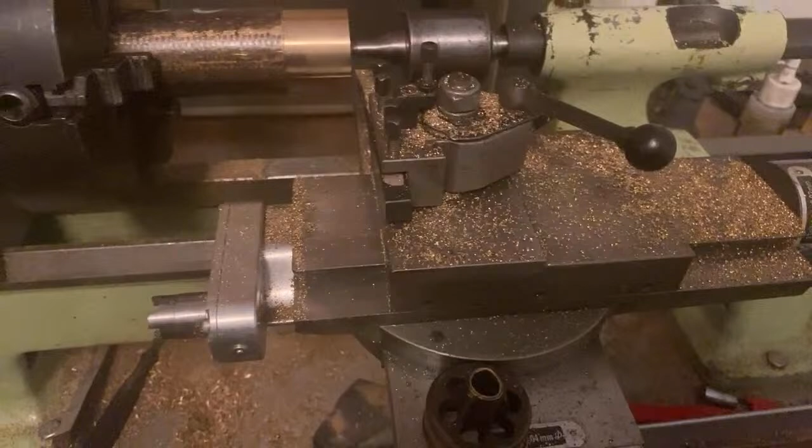And yeah, so forth, we will catch up tomorrow sometime and have a talk about it. But what happened? Got this painted. Look, honestly, yesterday morning I come in here and I thought I'm going to have a clean up, we're going to get some work done. Yeah, still pile of brass at the lathe. We haven't had... I'll catch up with you, Dan. It might be tomorrow night. It'd be good at some point, will we?

Anyway, I might be fine tomorrow. There's still a crap load of stuff we could do, scrape some grease off the roller if we run out of things to do. Honestly, I was going to go and give degreaser too, and I haven't done that. I haven't done anything. I had big plans this weekend - I was going to go non-stop, get everything ready to go. I spent 3 days in bed, 4 days in bed. And probably it's a long time since I've done that, so it probably needed it.

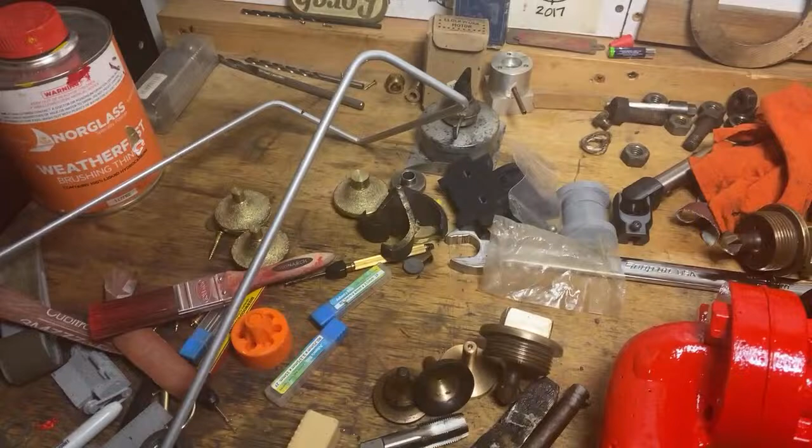So that's about it, that's what's happened. I haven't got any further to bending this up. I was going to come in and do this too. 90 proof alcohol might be the answer. The trouble is I don't get anything at all done the next day.

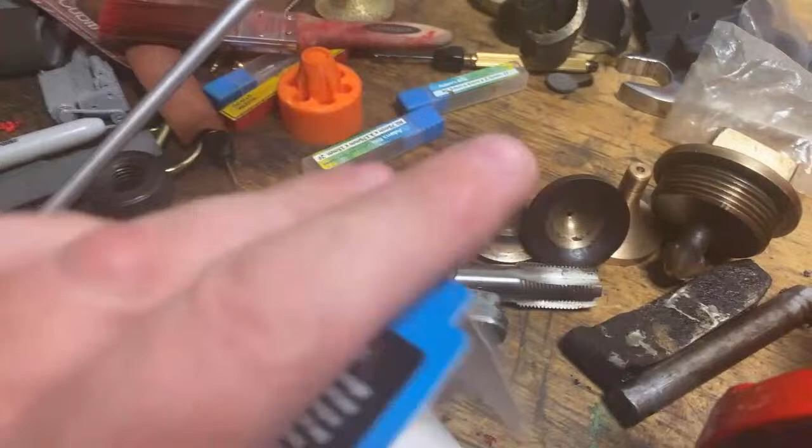Get the Robey back steaming would be great. I wonder how you're getting on with that smoke box and stuff. I did sit down with some CAD and converted this top quality Robey drawing. Right, that's what we got - top quality Robey drawing, converted it to a lot of numbers so that I can profile machine these.

These need doing at some point, so we've got to basically turn this casting, finish the bottoms of them and make them all fit, and then grip them that way around and profile turn them to match that. So it's a job that needs doing, but there's a list of jobs that need doing.

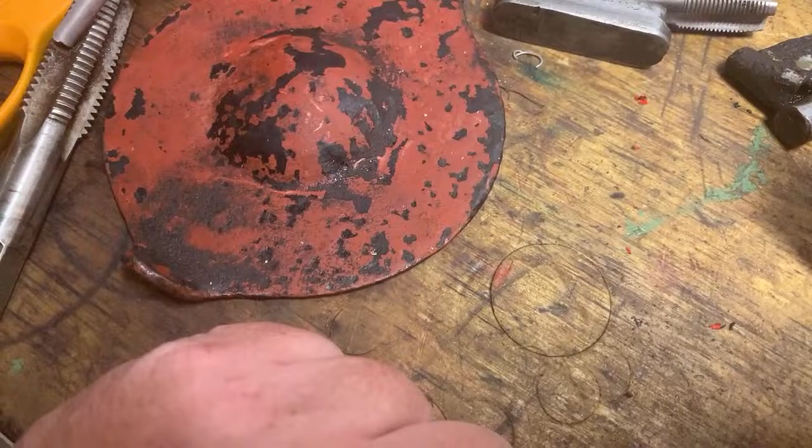There's also a bit of a mix up at the foundry because people are too petty to... it's not even that they're petty, they like to have... every organisation, every community organisation I guess, has that 1 or 2 or 3 people or whatever - 5%, 20%, 10%, probably 10%, 5%, 10% of the members who think that setting the cat amongst the pigeons is the best way forward for any organisation, and that's their mission in life, to do that. Not particularly happy with a couple of members at the Foundry Club. They know who they are. But anyway...

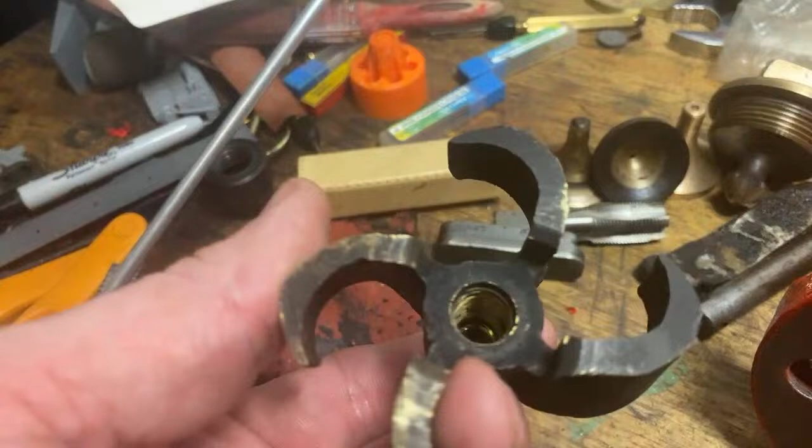Dallas has gone walkabout, and not sure when he'll be back, but he's got my patterns for that and some other patterns as well. Not helpful because I can't do the job until I get the patterns back.

That's all sort of been happening in the background too, and I've been trying not to be too involved with it all. But as I've said before, when 2 or 3 of us sit down in my age group that don't have a lot of real medical hold-ups or issues, I'm the youngest one of them. And I'm really the youngest active member, and maybe the most capable, I don't know, probably 4th or 5th down the list of people who've got some sort of knowledge about everything that happens at the club and the processes involved.

So I kind of feel like if you're going to keep the community going, someone needs to step up and help with that, and I'm not feeling like that's the thing. I'm fighting that, I'm resisting it.

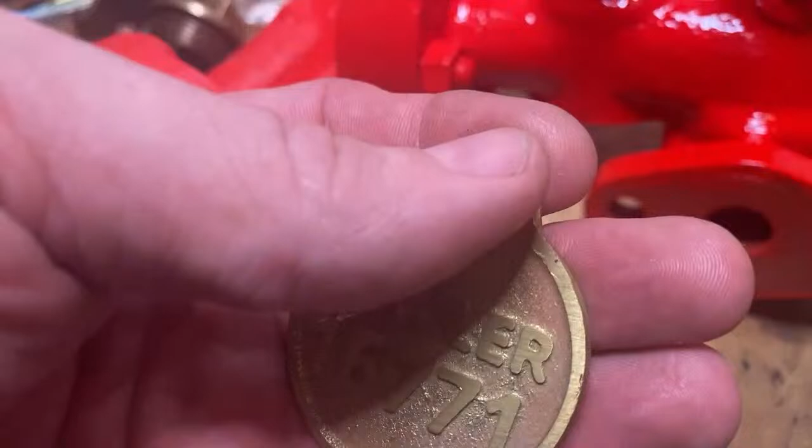This was something I was going to do and I forgot when I was red painting. I still will. Got these tokens and I wanted to finish these up and put some red paint in them. Because, anyway, that hasn't happened either. It's not a big job. I got the gaskets cut the other week.

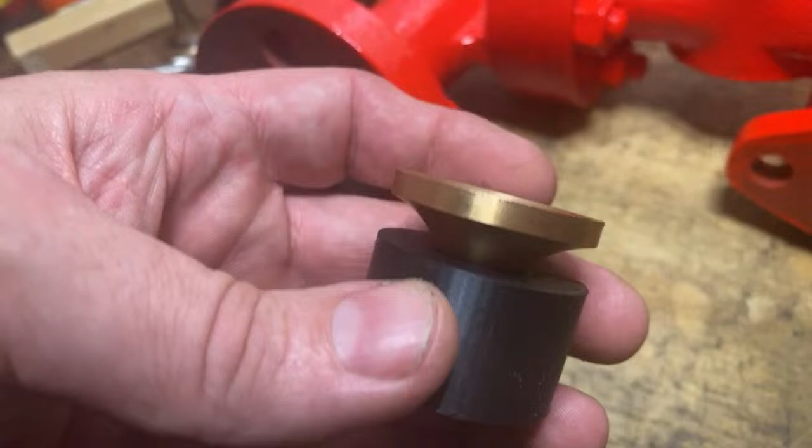This didn't work, right? This seemed like a really good idea. I don't know if I touched base with that. Right, the idea was that we 3D print a soft jaw to hold that, to machine the inside. Right, which we've done. I've machined the inside of them. They're pretty nice. But this is too slippery.

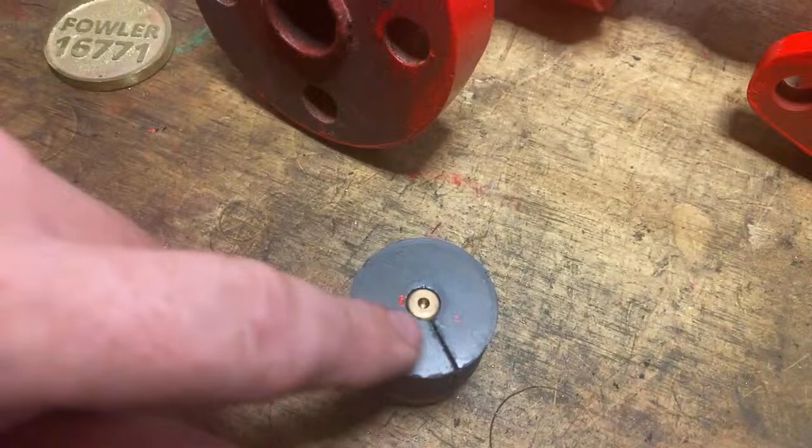Probably a piece of... I wonder if there's a way to do this with a groove in it, so you could run a bit of wet and dry, like a bit of emery tape around the groove. Run a bit of emery tape around the groove to grip it, so that when it squeezes it in, it squeezes onto there. We put it through that groove and round there, and make it a fraction oversized, and make a circular groove in there just so that it's easy to push in. Anyway, that might work. It might be a future iteration of that, but this one doesn't work.

So at about that point, I remembered that I had a collet chuck. After I... So I gripped him in a collet and had no further problems.

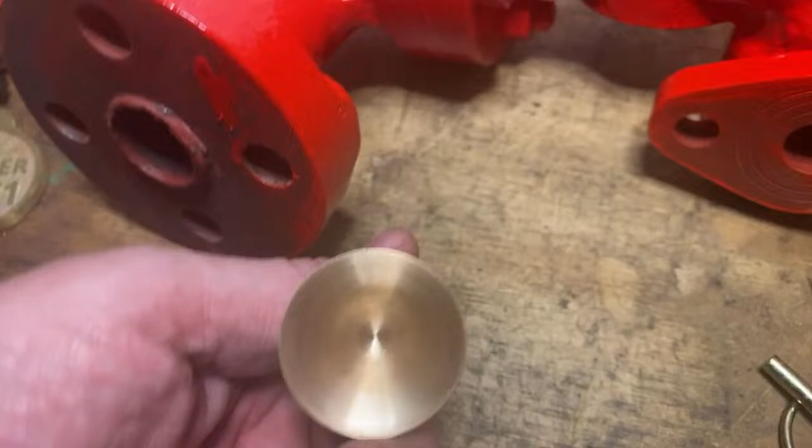But I run into them with... I didn't have a ball end mill, a half inch ball end mill. It would have been nice if I did, but I haven't, and I really couldn't run to one. It occurred to me that I probably should, but I didn't.

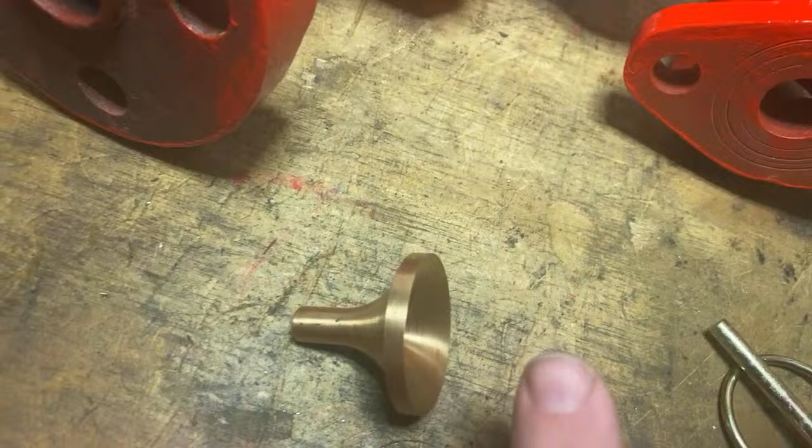So I just got a core bit and run in there a half inch core bit and run in an ordinary machined hole, and that cut pretty nice on the bottom. Just a router bit really, and then took a cut at 0.2 intervals out the right distance in to give us that curve, like from this side machined in, and then just clean them up with a scraper.

And I think they're pretty nice actually, but seats didn't happen, and I was going to have that finished by now, well and truly. Got to get this done, but didn't happen.

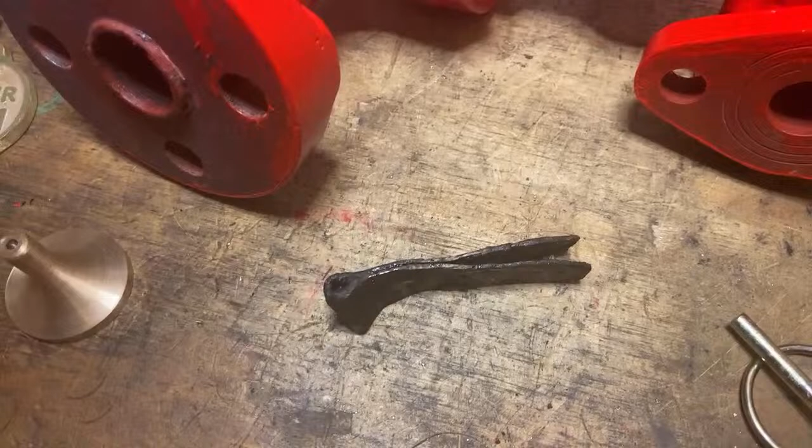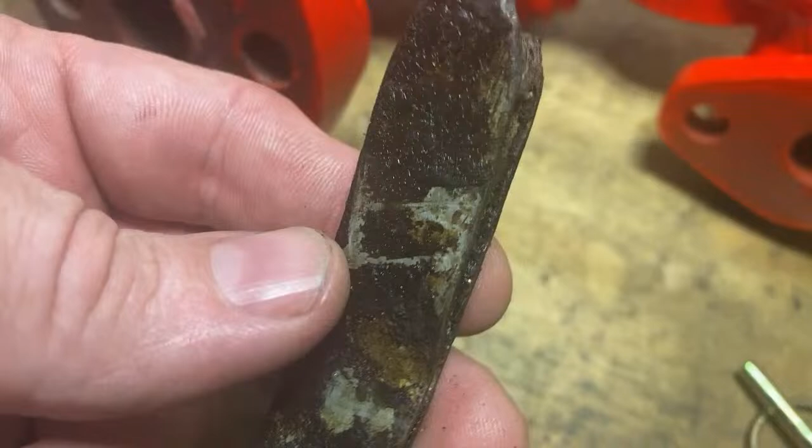I found a drawing for these. We had some discussion about this, and I've sat down and made steps in the right direction. This is what we had, not original apparently, poked through the slots in the bottom of the studs. There are 6 studs that hang down along the foundation ring in the bottom of the boiler.

Do I put a drawing? No. 6 studs hang down, and they've got 3/16 by 3/4 or so slots in them.

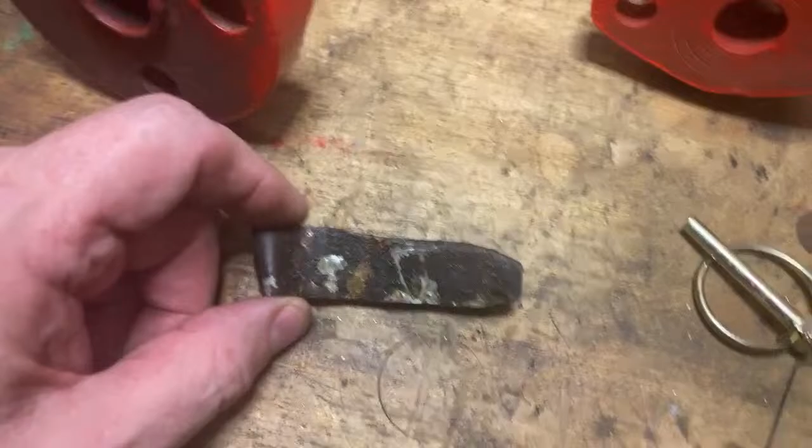These pins poke through to sandwich the ash pan against the foundation ring. It's pretty lousy, and they're very hard to get out. There isn't 6 of them the same - not even 2 of them the same. I'm not even sure this one's the same as itself, it depends which way up it is. And they're ugly. So I found the Fowler drawing, and there's a little split cotter or linchpin.

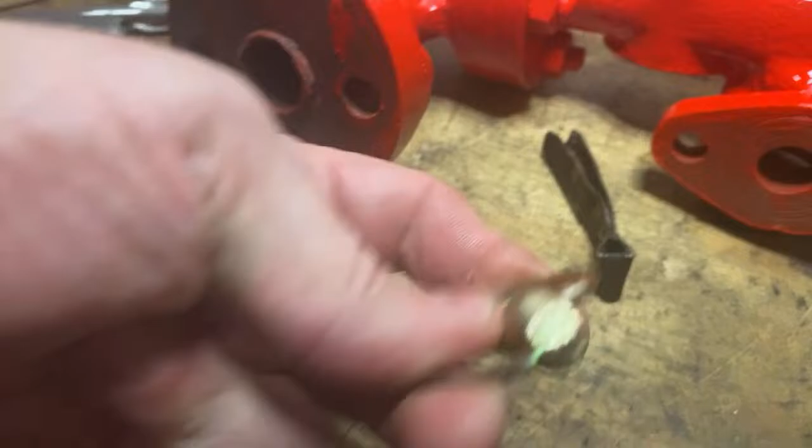By linchpin I mean this is a linchpin, but this one's got a retainer ring on it. A linchpin is apparently, according to all research, a pin like this with a square offset end on it. This one's got a retaining ring on it, but that's what a linchpin is.

So there's linchpins all over the Fowler, without the fancy ring on them, and there's no room for the fancy ring, so we're not going to do that. It's just basically a flat pin with an end on it like that, and sort of a half round top on it. That's not useful information.

There's a bit of paper. There you go, look at this. Oh my gosh, that was a bit much. Just putting it out there for a minute. There we go, look at this go. So they're this shape. This is sort of full size.

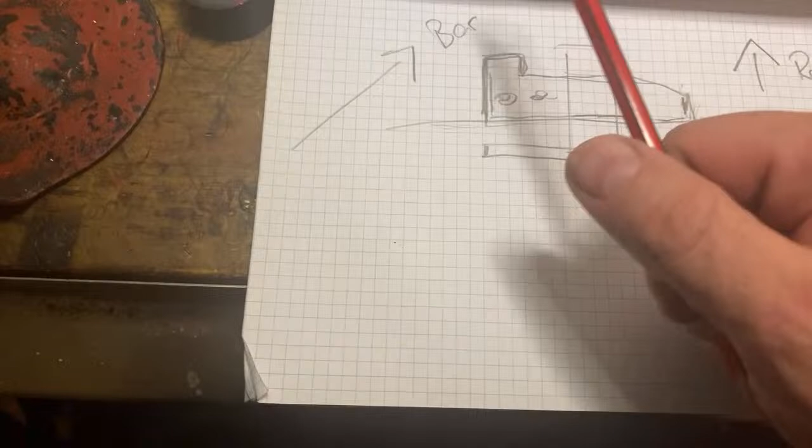So what I'm going to do is get 2 bits of 3/32, 2.5mm plate, cut to this right shape for each one, and get some holes in them so we can plug weld them. The bar is sort of... depending on whether you're looking on the ground looking up, which is that way, or actually, yeah, it's a bit difficult. So the other thing I'm going to do is put a hole in here, and put a round, decent big ring in there, like so forth.

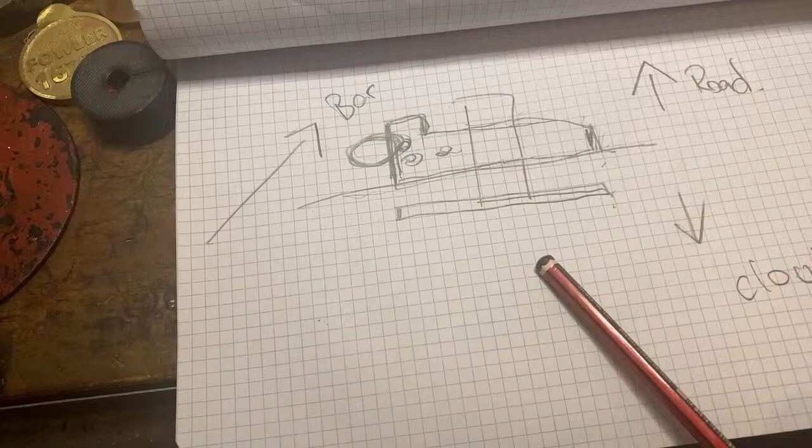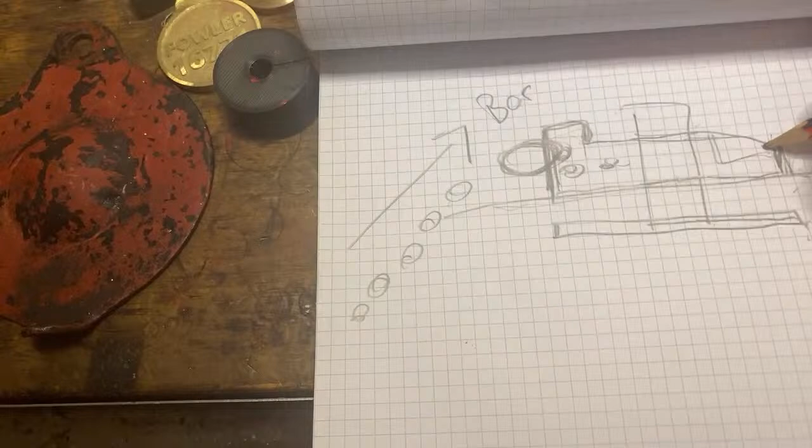Probably an airplane with an engine, probably an American airplane there. It's got engine problems, look. And the driver in the cockpit here, see, with the steering wheel and all.

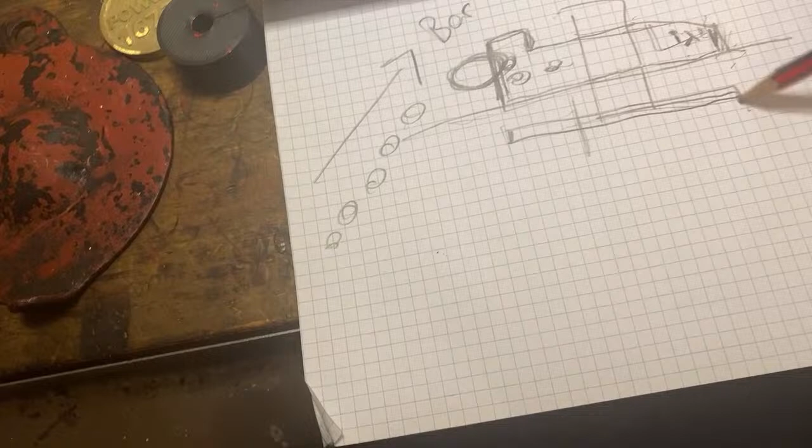There's no room to put a pin through, no room to do anything like that. It's a good idea, and I've been racking my brains trying to make it a little bit more 20th century, 21st century. But the best thing is just to get 2 pieces of stuff and plug weld them so they're held on the end, and push a screwdriver in them, spread them apart so you can push them back together with your fingers, and push them in, and they'll be good.

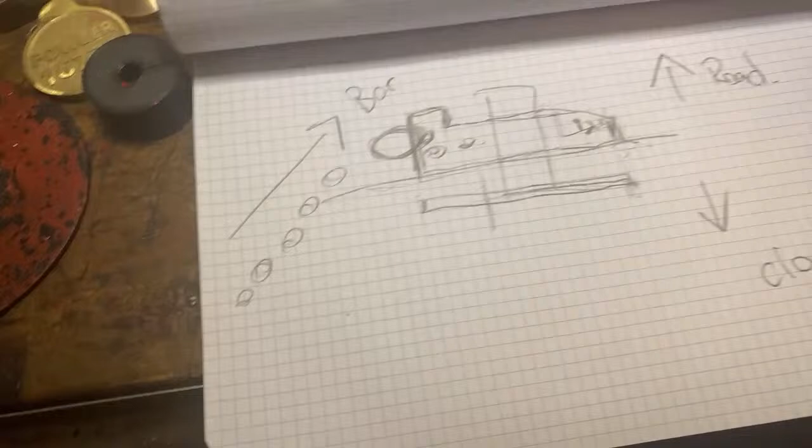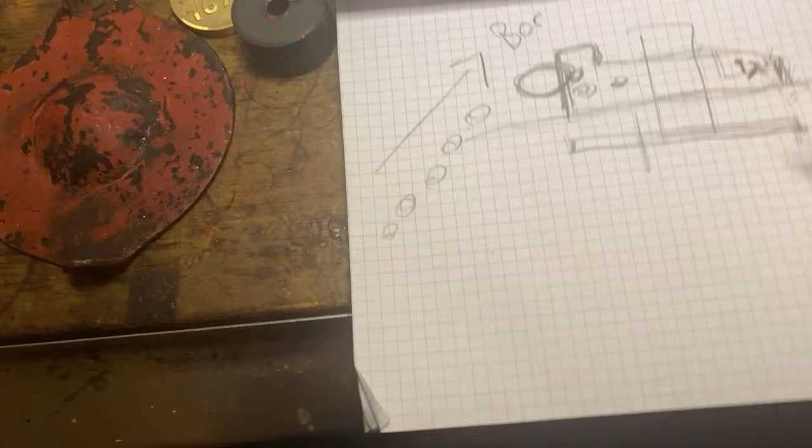While we're down that track, Dan, the reason I've drawn the driver is so you know that the chemtrails are not accidental. There's actually someone up there pulling the lever, flipping the switch, just so you know there are chemtrails being laid by this dude in the cockpit. Because that's important. I mean, mostly Sudafed, to be honest, but just so we know, it's a pretty good drawing of a... yeah.

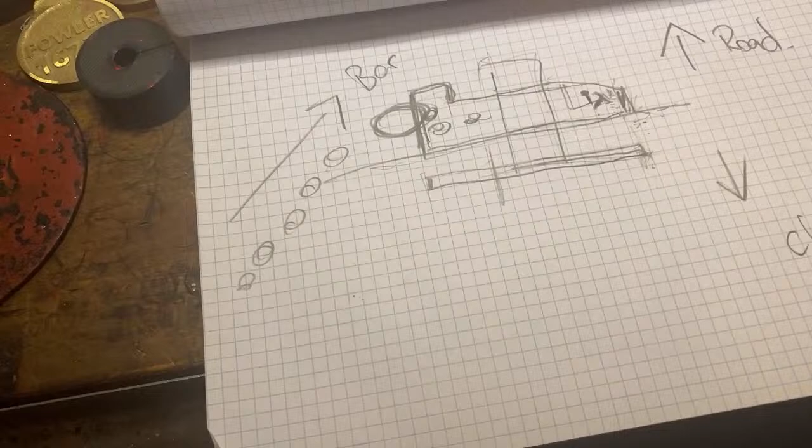He's actually here in the balloon.

This guy is not wearing a hat because he trusts in God.

If I had a sharper pencil you would see the echidna hat better, but anyway you're going to have to live with that, it's not a very sharp pencil. This one might be sharper - can you see this one? Yeah, this one's sharper. So this one's a 2B though. Oh, that one's a 2B too, so this should be just as easy to read, right?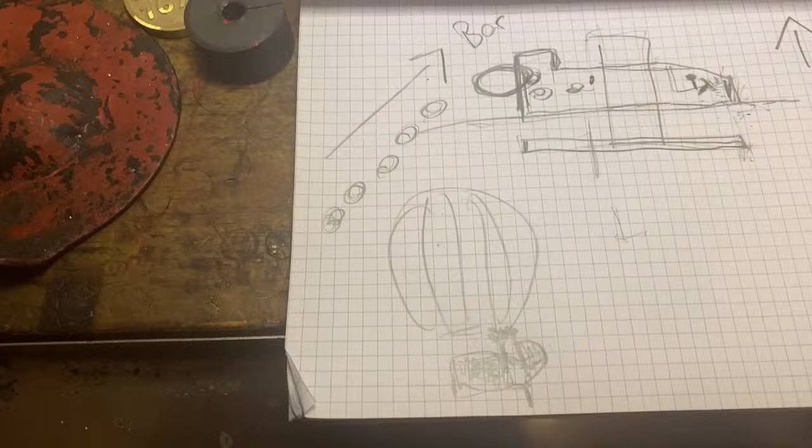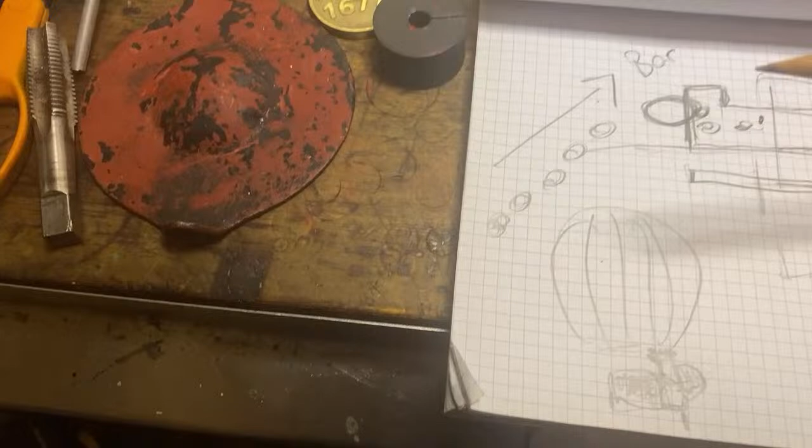These 2B pencils were really nice, but if you're running on paint that hasn't got a finish on it, like a clear coat, or some sort of water protection or stain protection on it, they tend to be very difficult to get off without a lot of wet and dry paper, 2000 grit wet and dry. So try not to do that.

Voice of experience.

Boar is the Lizard King. Hey, Randy.

So anyway, that's how that works.

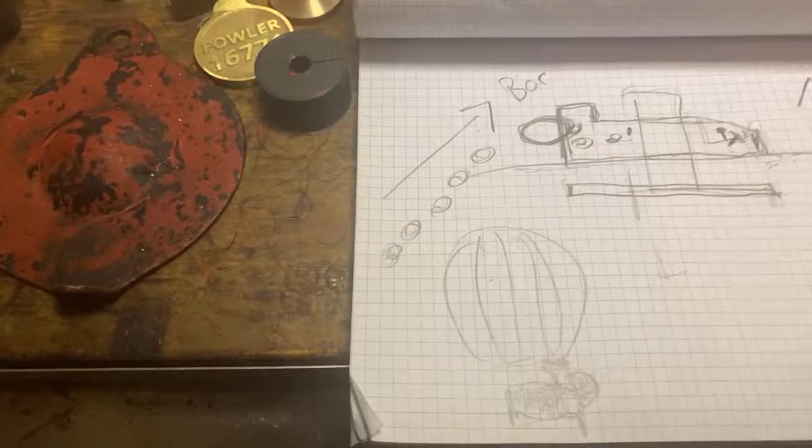Double Boost has been working on a similar pump. Who follows Double Boost - Big John Mills - is one of the most awesome YouTube personalities I've ever had the good fortune to meet and shake by the hand. Nice guy. Why he hasn't got a full-size engine of his own, I don't know. Probably because he's got more sense. But he does do a lot of YouTube work on engines, and he's been working on similar parts to this.

Yeah, right, Raptor coat stuff's probably not good for anyone, right? Darren, g'day. It could be a pulse jet, but it's very unlikely that they'd put whatever stuff's in the chemtrail into a tank and trust it to pulse jets.

And he's done a job on this. I don't really understand - someone else might know, but I'm not sure why he had to shorten this tap up. Maybe because the pump on... I really don't know why. Mark, maybe you could elaborate why he did that. But he shortened it up from there to there, and I don't know why.

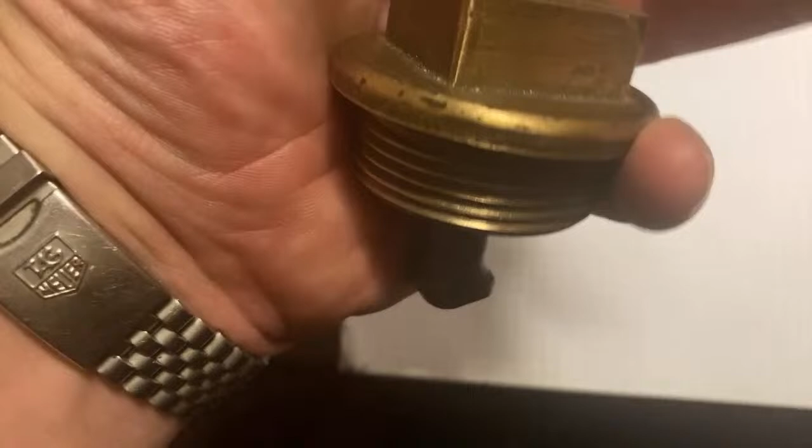But I've given these a bit of a polish. It's a work in progress, but that's something I have sat here and done over the last couple of days - not particularly enthusiastically, to be honest.

Hey, Chirp. I can draw hands.

See? Now, by the way, that's how you know I'm not AI, because I can count, see? I was wondering if anyone picked that up. But now you know.

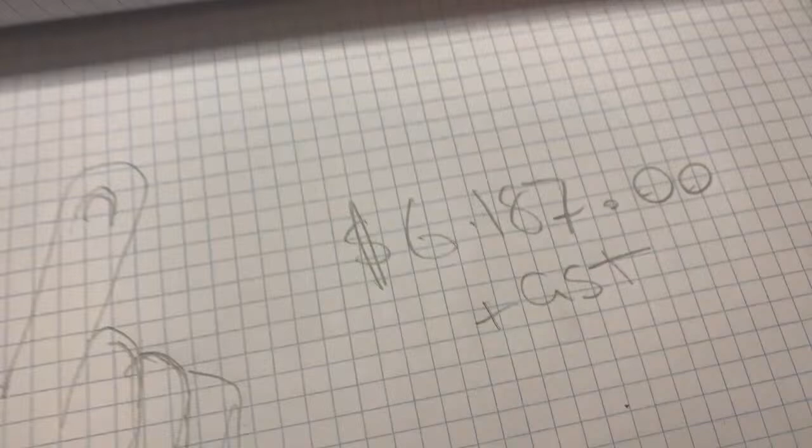So that's pretty much what I was quoted to do that. Not going to happen, right? That's a little bit crazy. Thread milling is probably a real good option on the lathe, but I actually hadn't thought of that. It probably is a good option, but you'd have to have a few passes.

What we're looking for is to put it in the mill, and what we need is a universal dividing head with a gear train that we can put on a mill, and then I could do it in my mill without any problems, make a steel worm and get the gear cast. Now, I had every intention this week of opening a CAD program and spending a few darkness hours actually CADing up that wheel. I've got a drawing for it.

But let's break this down, right? This seems like you don't know what things are worth. Very easy to say, oh, you're out of touch, you're old, you're a boomer, etc. I don't think I am a boomer, but you know, I'm not yet.

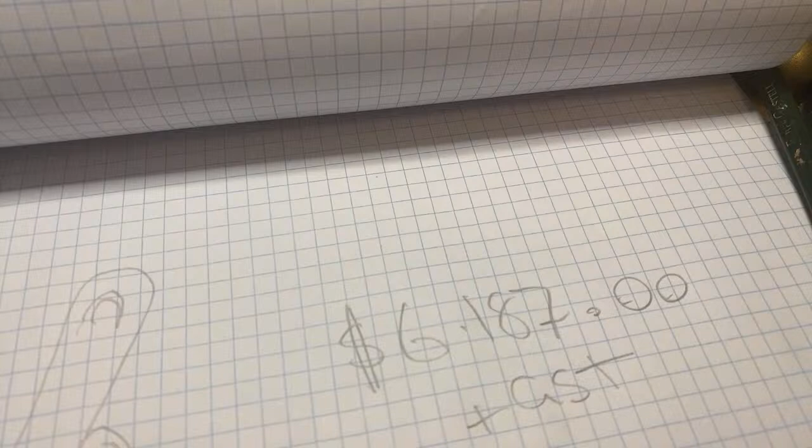But let's break this down, right? If you're employing a bloke, if you're employing 3 blokes, and you're paying them, what, $52 an hour, something like that, which is pretty good in machinist wages - it's probably about what a machinist is worth in a place that's got plenty of work and can't get people, and you require some skill. It might not be either, but I'm guessing that's about what tradesman wages are.

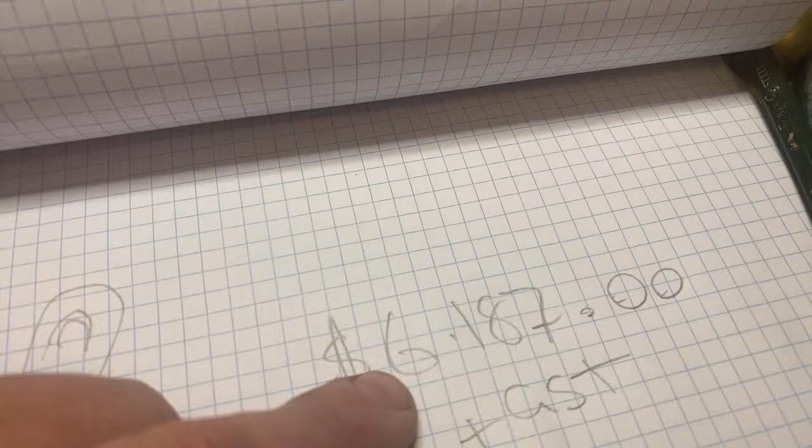That might be way too ambitious, it might be 40. But if they're working a 38-hour week, right - say they're working a 40-hour week, 10 hours a day, 5 days a week on this - it's $200 a day per guy, right?

Now, 2 guys to make this in a week, I guess is probably realistic, right? So you're looking at what, $2,000 roughly, something like that - a couple of grand in wages.

And then probably give them a couple extra days to get things in case something goes wrong. And then you've got to buy some tooling - allow another $1,000 for tooling, like a cutter for it or whatever. If you're going to buy a cutter, or you've got to buy a couple of inserts - there's a pretty reasonable chance that a place set up like that's probably got a tool holder or a cutter or something that they can use.

So, but even so, at $20 an hour, that's still only $4,000 to do it, mate, in the worst case scenario - 2 guys, 10 days each. I would like to think that if I was making this in the machine shop, I could have it out in 3 or 4 days. It's not that difficult - rough up the wheel, and then there's a bit of time cutting the teeth.

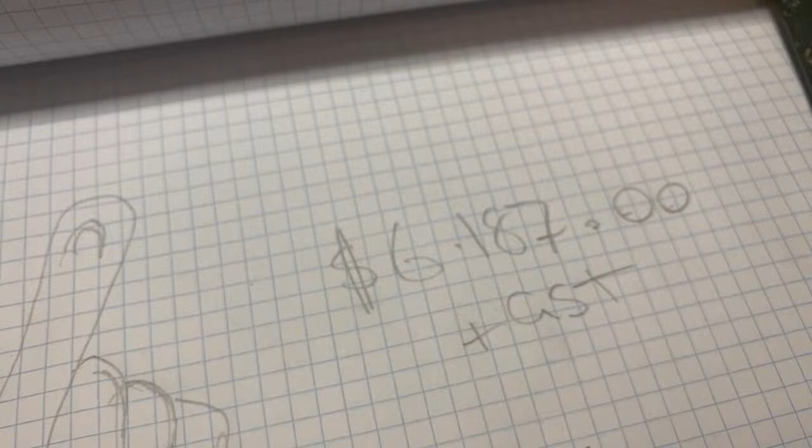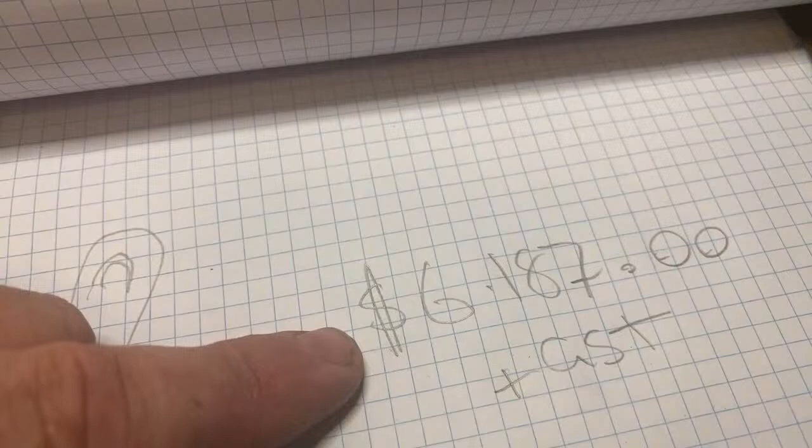Anyway, worst case scenario, I was expecting about 2.5 to 3, right? I was thinking at 3,000, I would probably nearly go ahead with it. Take me a bit to pay it off, but I'd sort it out, I've got a couple of months to do it.

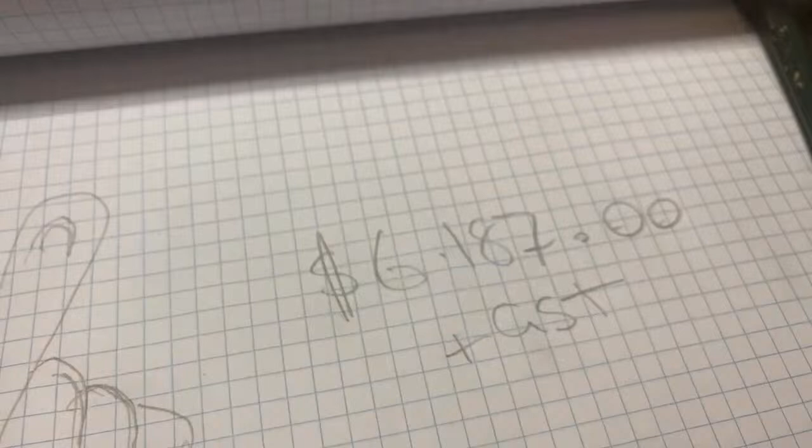On 6 grand, that's a bit crazy. So they obviously don't need the work. And with GST, that's another $600. So, 7, something like that - nearly $7,000.

Might be a project video series. Yes, we could probably do that.

Right, it's got a hole through it. Right.

See, the worm wheel's sort of that shape, with teeth sort of that shape. So to cast this, if we put a parting line this way, you've got this piece sticking out here, which won't come out of the sand, right?

You could make a... hang on, I've got bits here. We can demonstrate this. This one I prepared earlier, right? This is about the size of it. Right, we can make something like this.

And make this pattern this sort of shape, extruding from the center, and make cores to fit in there, so that you drop this in the hole, the pattern in the hole, and then lift it out, and then drop the cores in, and that gives you the gear shape. That's one way of doing it.

I think the teeth in the bottom have got to be round too. That's the thing, Chirp. Could do it that way.

Or, hear me out, we could have it so that it splits through here, this pattern, right? And the centre lifts out on like on a taper like this, when it's all rammed up.

Darren, yeah, but you're only filing yours up a bit of brass, it's different. Did I say that? That's a terrible thing to say, and I'm sorry. I'm remorseful for that. Anyway, Chirp, your customers are English too, so obviously they don't pay as much.

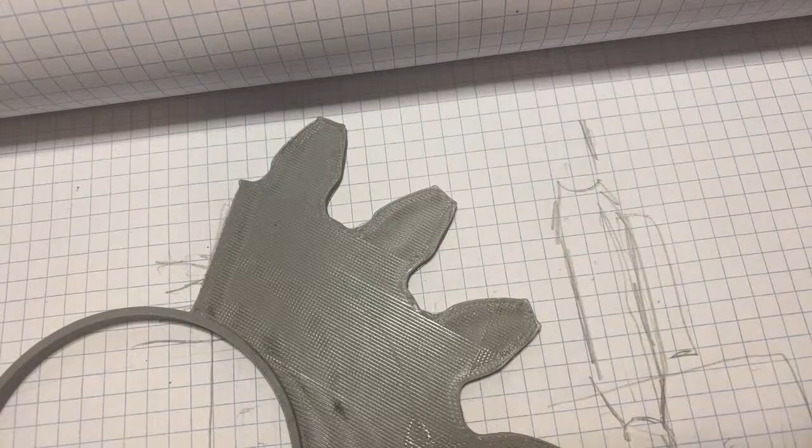Yes, you probably could. What we need is someone with a universal dividing head and a fairly big cutter to do that. And really, if you were going to do that, I mean, the hub and this centre boss and everything's all pretty simple. I think you would just buy a new bit of stock, it'd be cheaper, and make it and machine it out of that.

That's the other thing, is you could make a core box with a sodium silicate core that you lift the gear out of and drop that in a hole and pour in that. So that's another thought too. To do the teeth outside, like Chirp says, that's another thought as well. I'd have to have a look and make it.

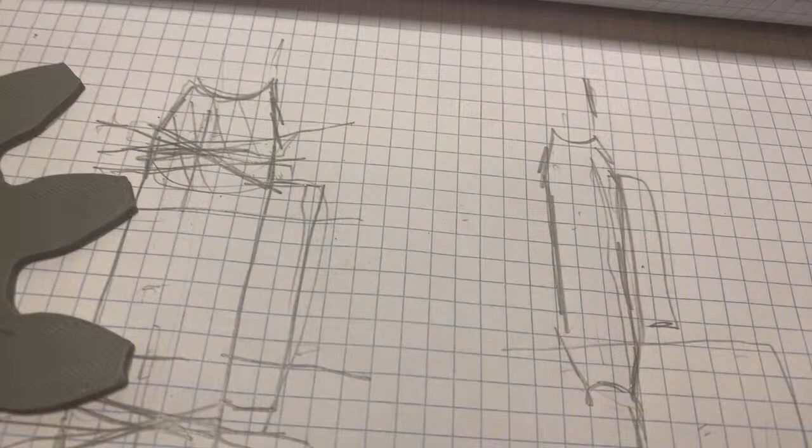Anyway, I'm giving it some thought. No real direction on that yet. But the worm's easy enough. If we've got a universal dividing head, the worm's easy enough.

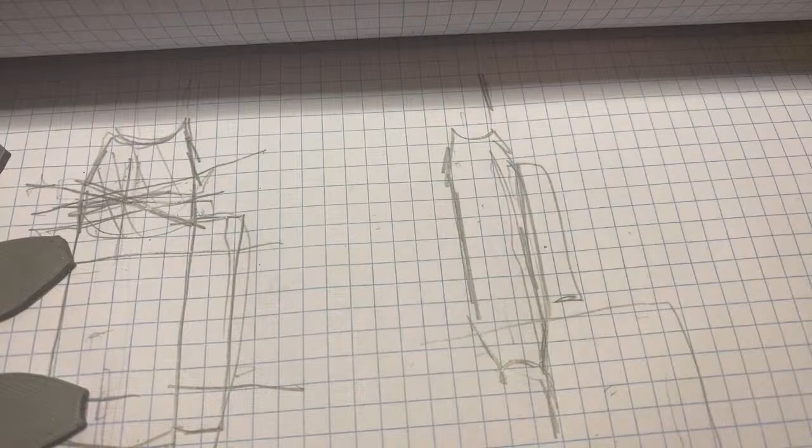Yeah, you're right, Chirp. Move 5 to 10% of the weight. I would like to have a gear, if I was going to cast one, that I didn't have to take anything off. If I had a gear I could clean up with a file, I'd take the sand marks out with a file and drop it straight on.

But honestly, rather than cast it in steel, I'd probably just make a steel gear. Just buy a bit of steel stock and cut the teeth, if I wanted to go and buy a dividing head. I can do it in my mill.

These teeth don't have to be a perfect profile. You do the root in here, make another cut and drop it over 10%, and do it on a mandrel so you can turn it round and do a cut up the side there, and a cut up this side, then angle the head over a bit further and do another cut, another cut, another cut. You'll get sort of a semblance of a curve there, close enough for a tooth on a gear this size, and then rub it with a file.

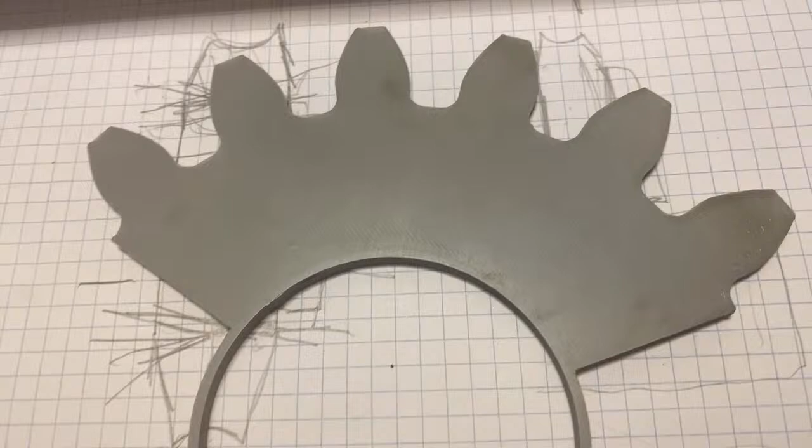But the other thing is that a friend of mine who's just got a heap of gears cut put me onto a foundry that can cast any grade of steel. They're probably worth talking to, because he reckons it only costs $300 or $400 to get this gear actually cast in steel.

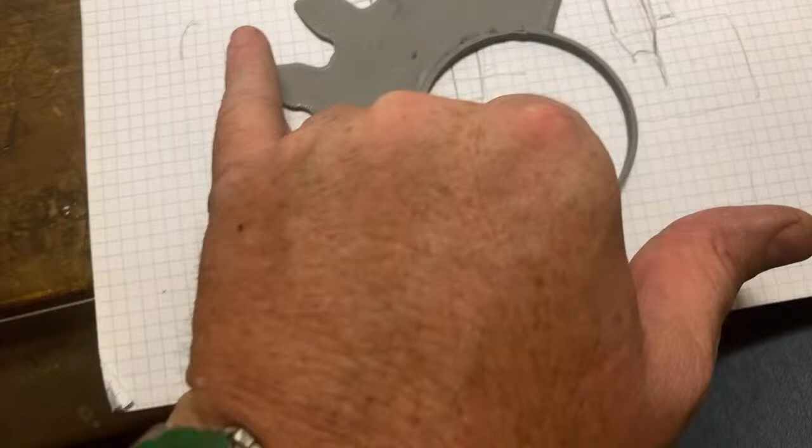And if we were to do that, then we'd be pretty happy. How big is it? Total diameter, about... have I got a ruler? No, I haven't got a ruler. Yeah, I've got a ruler. Got a ruler that reads backwards - it's a Starrett ruler, of course it reads backwards. 7.5 inches.

I would say you'd probably make this out of cast iron or steel. You'd probably do it in bronze, and I could do that myself. The other issue with this, right,

is that these teeth have a helix angle because the worm is this shape, right? Looking at it, the shaft through the centre - this is simplified, it's not really this shape - and then the gear runs basically in here. Actually, the one that's on it is probably that shape with this, right?

So because of that, these gear teeth, looking at the edges of them, are actually on this angle to match. About 7 inches.

Like Bill says, it's enough for the girls he goes out with.

So that's another reason why this won't just pull out of the sand, and other systems need to be put in place to make it work. So if you were to make each of these teeth in modules like this that pull out, I think that's the easiest and quickest way to do it, to be honest.

put it all back on the roller. So that might be a very good thing to do.

But I think this would improve the handling of the roller, and the safety of the roller, and the noise of the roller, and the controllability of the roller, hands down, more than any other thing on the machine.

So that's something that needs doing. Anyway, that's what I've been thinking about this week when I've done nothing in between naps, and I've done a lot of napping.

The existing gear is wrong, right? Yes. Correct. No, that's not right.

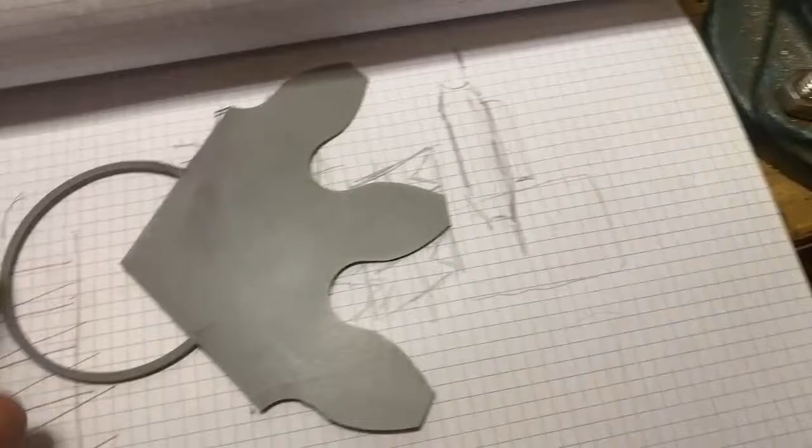The existing gear looks something like this, right? This is the teeth profile of the existing gear. And there's the new one. This wouldn't have worked because if we put this existing gear at full tooth profile, which would actually mesh with the worm quite well, into the gear case, these teeth would bang against it and wear it out, if you could even move it.

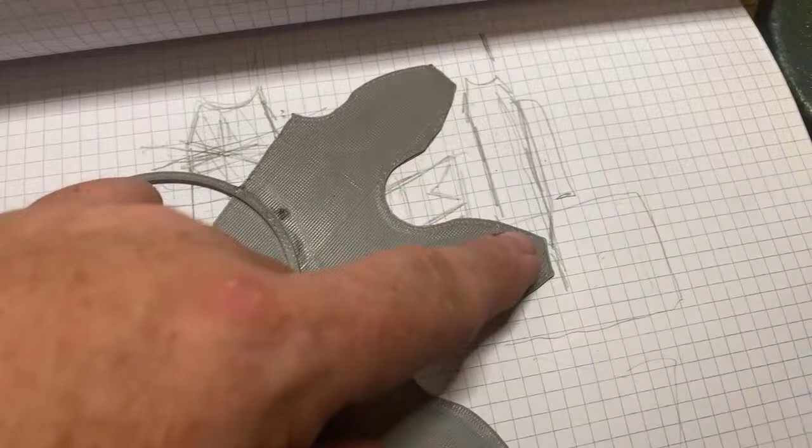I don't think the gear case would fit. So what's happened with the existing gear is that someone's had a gear that looks something like this, and we'll use a Sharpie here for clarity.

They've basically shortened this up like this, on each tooth, with the grinder, which is ugly, but it brings it down to the right diameter, see? Sort of.

And as such, that's great. But what you have is, if we draw around this - see, we've got the Sharpie out now. We should have got the Sharpie out to start with. If we look at the worm, the worm profile's like that.

Hey, William. Big shoes to fill there, William.

The worm looks something like this, right? And we put these chopped-off teeth like this in here. They've got literally enough room in here to put your finger in, and that's how much backlash you've got.

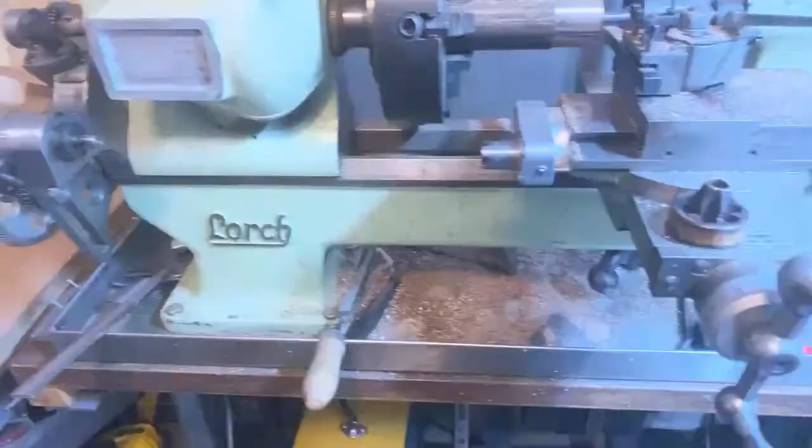James said about the lathe. Nothing's happened over here except we've got piles of brass and bronze. I haven't even pulled this out to put the 6 holes in there. I was going to put the holes in each end of this and get it going. Hasn't happened.

Apart from that, no progress on the whistle. No progress on this car. I don't know if James saw that last week. This is something that I've got to go and see the guy about when I get some holes in this base.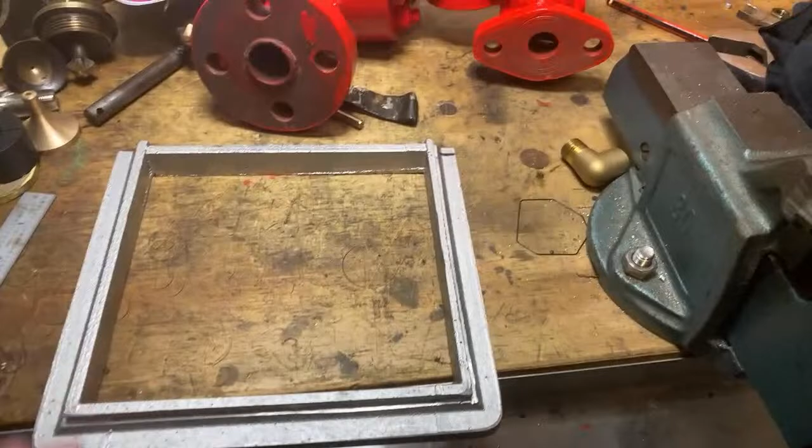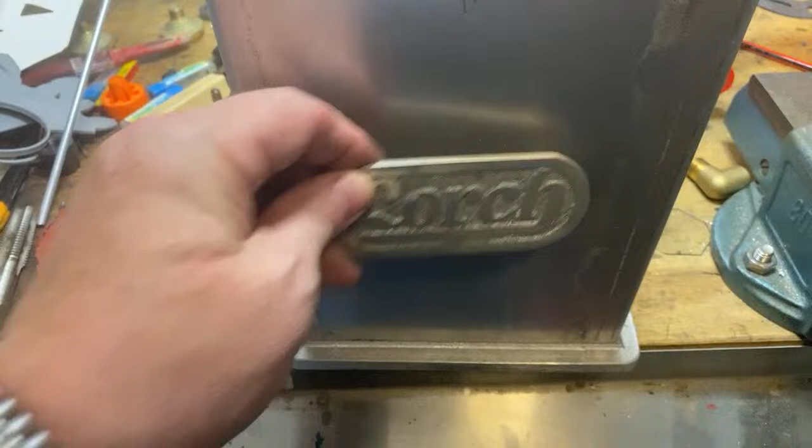Got to work out, I think I'm just going to machine that down to fit round that plate, and put some holes in it. I found some nice brass wood screws to screw it down. TIG that on there. Plug weld that in there. And probably TIG this as we go around and bend it to match the profile, I think. If that's the easy way. So that's the...

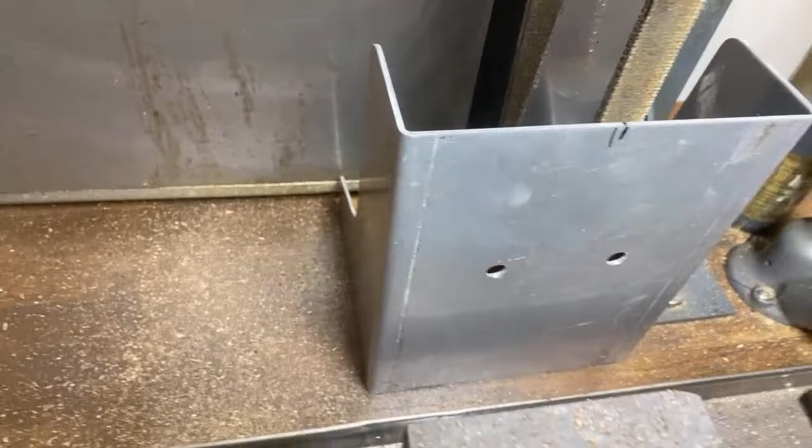It's not even a belt guard because nothing's going to worry the belt. But it's more to stop things dropping down the hole, sort of a guard. That's sort of more what it is, because if you're parting off something small and you drop it over the back and it goes down the hole and it hits the belt pulley, and then it ends up on the floor here somewhere, and you've got to make another one. But that's just how it is in this world. So that's something we're making, but I haven't done much to that, and it's not really a priority, but it's one of those things.

Yeah, I'm feeling a bit ordinary actually. Sorry guys.

Yeah, I've got quite a lot of CAD work done on the metal work for the roller. Bits like these, Mark, I've got mine drawn up anyway, and I think we can pull the drawings off the measurements off yours and convert it. I have to come up sometime and measure it up. And we'll go from there.

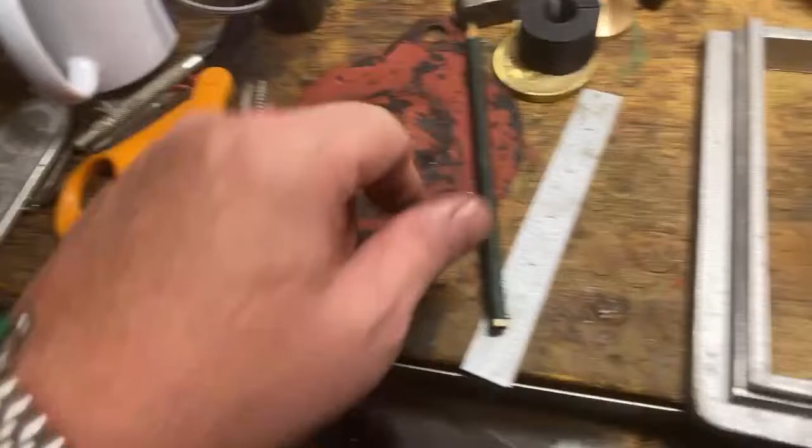A couple of spare ones of these, make it 4 of them that get made, and if we're going to press them, set them up and press them. And like John says, just a tow ball and a washer behind it, or a round hole in something. And he reckons we can probably press that without any problems at all. So I make a couple extra ones of these, just so probably I can sell them, pass them on or swap them or something.

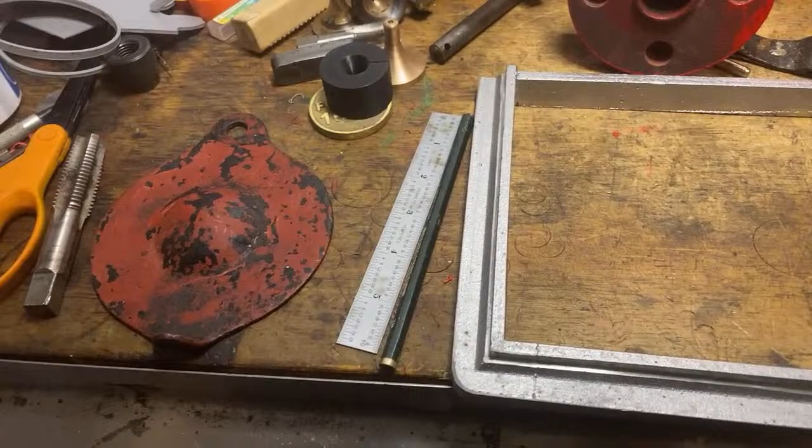What else has got to be done for the roller? I've got a toolbox for the back, a wooden toolbox that I'm in the process of having built, which would be really nice, for things like tokens and logbooks and clean rags and stuff, so the gloves and so forth. So that's another job.

There's quite a lot of steel parts that need to be made for this, those cotter pins or lynch pins for the ash pan. Quite a lot of bits.

Anyway, that's where we're at. Now...

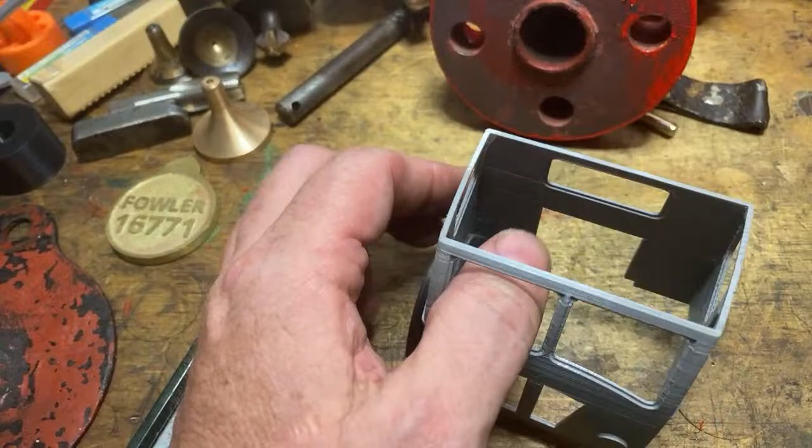I've CAD this up because there ain't no drawings, there ain't no nothing on Foden stuff. On Atkinson stuff, which doesn't really interest me, there's a lot of stuff. There's quite a bit on Leyland, and quite a lot of other things. But on Foden, the actual truth of it is that Foden had something like 48 official cab designs in the 1940s alone. It's like 5 different ones a year.

But yeah, basically, high-build primer or something really good—yeah, it does a bit, David. So they're not terrible quality, and a coat of either high-build primer or some decent filler and sand and sponge or a block, and it'd come back pretty good.

Anyway, this is the FG model Foden, and the other good thing about Foden is that because there's so many different designs of the cab, when you look at them online, you can't see two the same. There isn't actually two the same. They're all different, so of the preserved ones left, they're all different, and you can sort of pick and choose. Some of them got 3 windows in the back, some got 1. Some have got this strip on the side, some don't. Some have round headlights, some have dual headlights. Some have got vents in the top here, some don't. Some got vents in the side, and some don't.

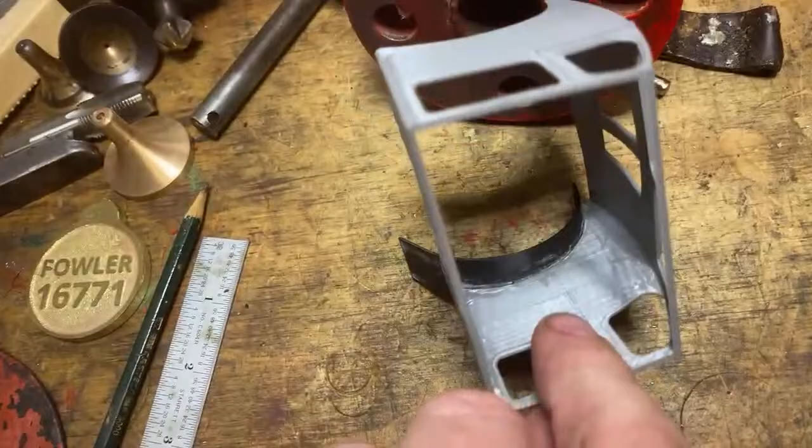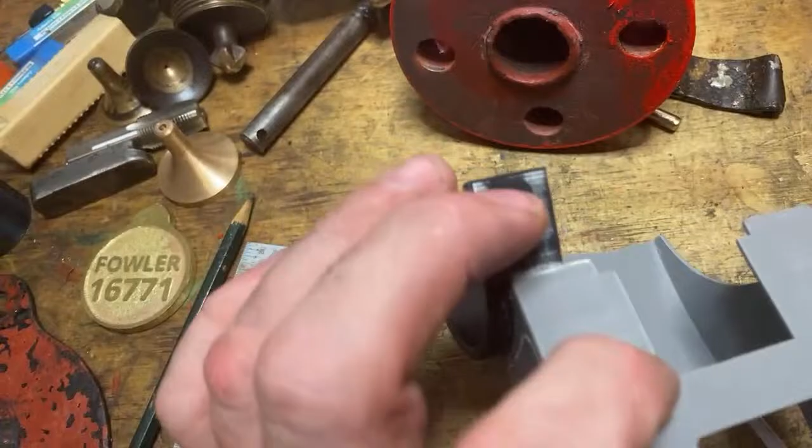But only the back is flat, that's right. So what I've done with this prototype is run a strip on the mud guard so that they key into place and are easy to fit up. Also, excuse all the glue on them, because I actually got my tube glue out and had no luck with it, and discovered it was actually super glue remover, not glue. So that's probably why I couldn't get it to stick, and got it everywhere. But anyway, we won't go there.

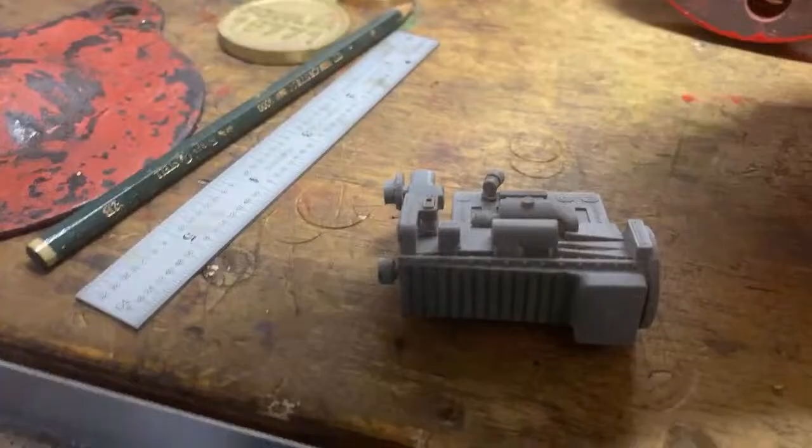So that's the first time I've ever glued anything out like that in plastic, ever. A few weeks ago I sat down and did this, right? And this isn't a particularly high quality print off my printer either, but it's all right. I've called in a favour with a friend who's been awesome about it, and he's actually resin printed the parts for this. So I put some filler in the bottom there, see, that's enough to cover that. But I haven't actually started this, because none of these parts are going to be what's used in the model.

So you're all stunned now. See, don't think that I'm in any way, shape or form less crazy than I am, because that's not how it is. But this is all just proof of concept, to see if it works. There's a few issues, like there's some sag here in the headlights, if you notice, they weren't supported well enough. This grill on this iteration didn't work, and I fixed all that.

It needed some vent doors in the side here, I decided. I'm not really happy with these inlets here in the vertical columns. I'm wondering if I printed it that way up so the back was flat, whether you'd get better results, but I'm not sure you will, because you lose quality on the inside as well. And I'd very much like to make that visible. If anyone's got any real feedback on this, go for it, tell me where I'm going wrong.

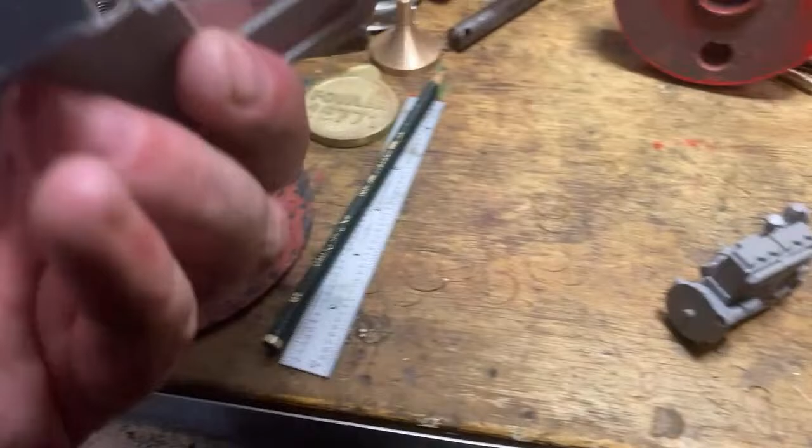Anyway, you'll probably see excerpts from that when I think of it.

Still got to put a gearbox on this. One of the few things I bought was a resin kit of a Perkins P6, in 1/24 scale, with a gearbox attached, but I don't think it's the right box.

Because probably this had a 6-speed with 2-speed overdrive box, which is fairly distinctive on this. So we're probably not going to make it a big truck. I don't know, we're probably only going to make a 4-wheel tractor, like a prime mover, which according to the spec sheets is only about 10-foot wheelbase, something like that. So it won't be huge, it'll probably be this long.

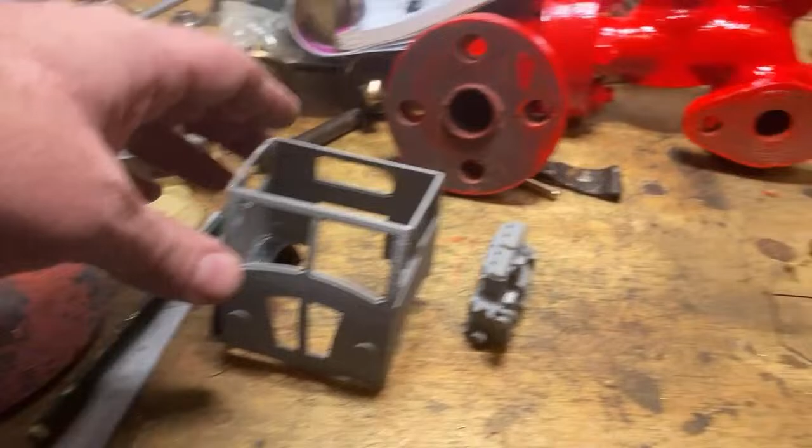These were still kicking around the farms in my childhood. It was long, slow trips to town from the farm with loads of potatoes and animals with these things. Usually overloaded, usually tarped off, usually raining, usually 3 inches deep of brown mud.

And then later in my teenage years, probably getting them going and messing around and running them around the block and stuff. But never ever took it any further than that. I very much like a full-size one, but life's too short.

No updates on that, but Nick's pretty well onto that, I have to ask him. We will have an update from Nick. We might even get him on a livestream at some point this year. Nick Jarrett is a top guy. When he finishes it, he'd probably be very, very happy to sell it back to me, to be honest, if it comes to that.

This thing tends to be a bit all-consuming, to be honest, as far as steam goes.

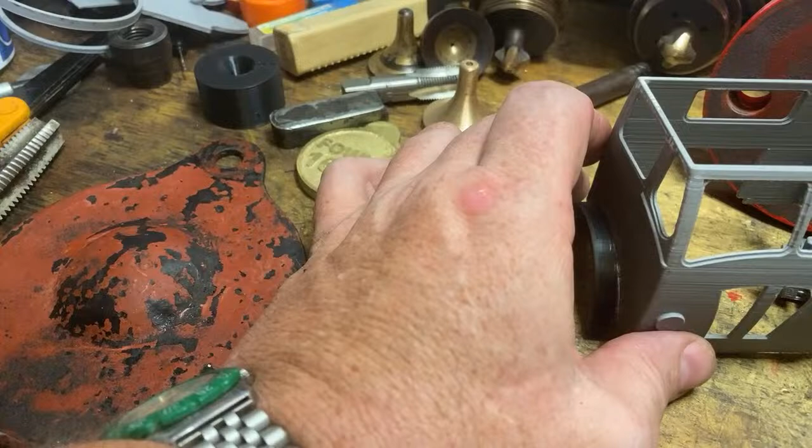I'm back at work tomorrow. It's Thursday, I'm really not feeling it. And work is pretty crazy at the moment, so I've been head down and up to my elbows in mostly solar powered watches and other stupid electronics devices. It'd be very, very nice to have the rest of the week off to get this done and get the fridges, but I don't think that's going to happen. I'll get the fridges, I think, at this point.

I'd like to. We'll see what happens.